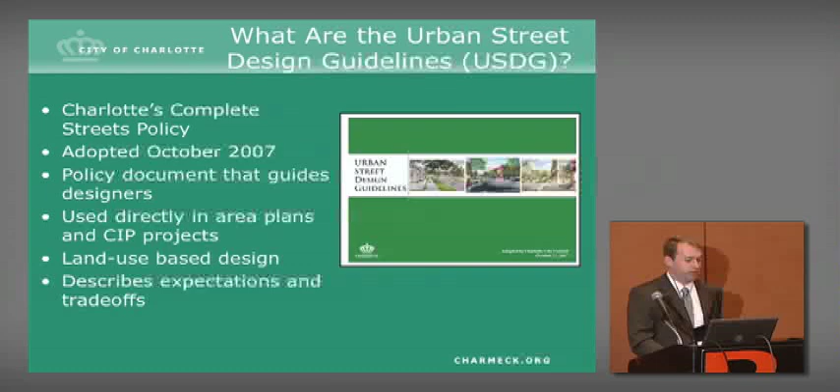But the part at the bottom was one I wanted to emphasize, which was there's a trade-off kind of rationale present in this manual that says you can't always have everything you want in your street. That's the art of good design for us—when you can't have everything you want, how do you begin to prioritize which things you are going to have?

In terms of Charlotte and why we felt like we needed a complete streets manual, when we assess ourselves and look at statistics like this, most of our thoroughfares do not have sidewalks at all. We were a city, by the way, that grew up around the automobile. There are even fewer sidewalks present on our local streets.

About half of our signalized intersections are considered poor for pedestrians. Almost all of those same intersections are considered bad for bicyclists. And about 1 in 5 of our thoroughfares are considered highly congested.

Looking into the future, we think we'll continue to be a city of growth, and over the next 20 years or so, we're expecting population equivalents of Cincinnati, Pittsburgh, or St. Louis to move to Charlotte. So we're going to have to provide infrastructure to meet those mobility needs.

So in summary, this complete streets policy is about how can we provide mobility choices for all kinds of users, build in lasting street quality through the designs, and do it in a way that really responds to the context. This is an AP-BP conference, so from a pedestrian perspective, there's obviously more to it.

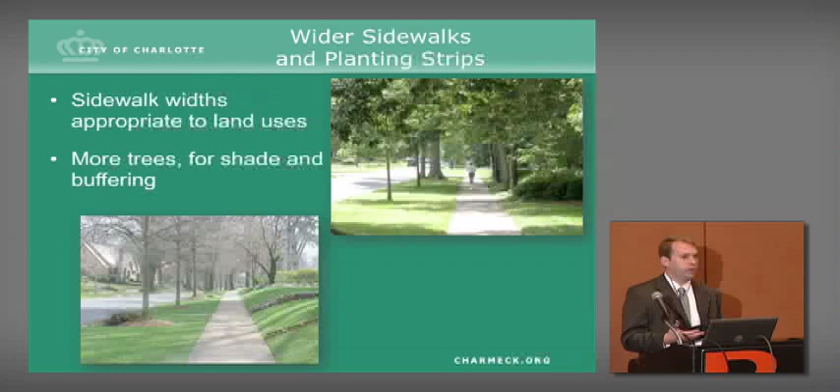The basics would be that you want sidewalk widths that are wider than what we've had in the past, but also appropriately matched to the land uses they're adjacent to. You also want more trees, more tree canopy, and separation of pedestrians from vehicles.

From a bicycle perspective, that's a philosophy that says, of course, we want bike lanes on higher volume, higher speed streets, and on lower volume, lower speed streets, we'd like to do a better job of doing bike route signage. And the cool thing about bike design is generally if you've done a good job with that, you've probably advantaged every user, not just bicyclists.

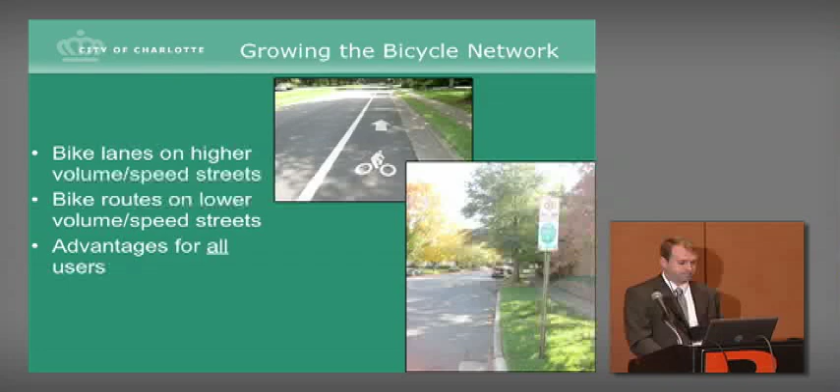One other point of emphasis in our manual is how to treat intersections. In my experience, really anybody can do a pretty decent job of designing between intersections, but it's at the intersections where all the action is. That's where all users are tending to compete for the same space at the same time.

We felt the need to create a level of service standard that was homegrown for us to deal with pedestrians and bicyclists, because we knew that historically intersections had been built around a level of service standard for cars, and we felt like we needed an even playing field to really make good informed choices.

The other part of it was - and for any traffic engineers in the room, you might know that the traditional way of evaluating how many lanes you need at an intersection is based on something called a peak hour standard for congestion, which is really a misnomer, because what you're doing with a traditional methodology is taking the worst 15 minutes of the worst hour and designing for that. And of course there are consequences all day long for the choices made for that worst 15 minutes.

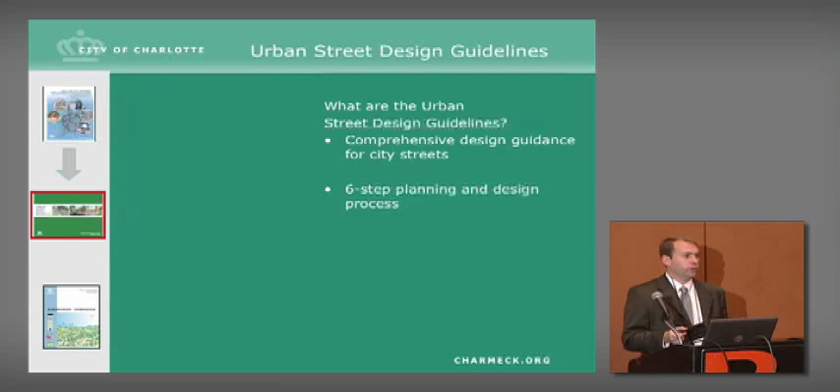Thinking ahead to implementation, the authors leading up to the development of the policy realized that what we were generating was a very thick document that few people were going to read, and we didn't want anybody coming back later saying they didn't know what they just adopted, or that they missed something. So some of the most vital components of the manual were brought forward in 17 very clear statements, so it's the first thing you read. And if it's the only thing you read, you've probably done enough good.

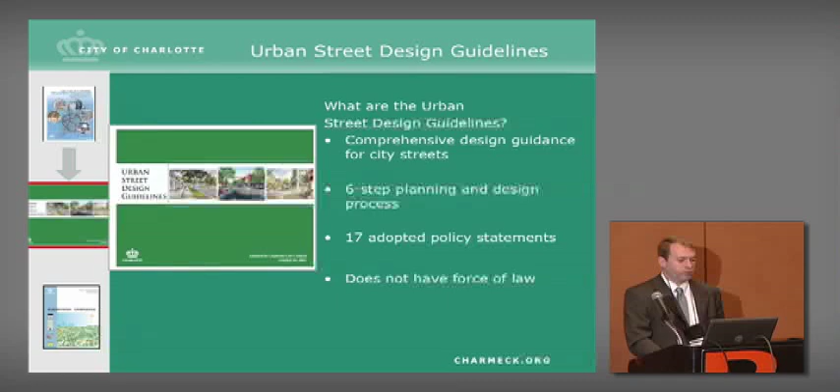But the other part of it is that the policy itself does not have the force of law. It just compels us to want to do good design. So when we're doing our own projects, we can create things like this and have implemented good projects since the advent of the manual. But if we stop there, that's all we're going to get: good designs on projects we control.

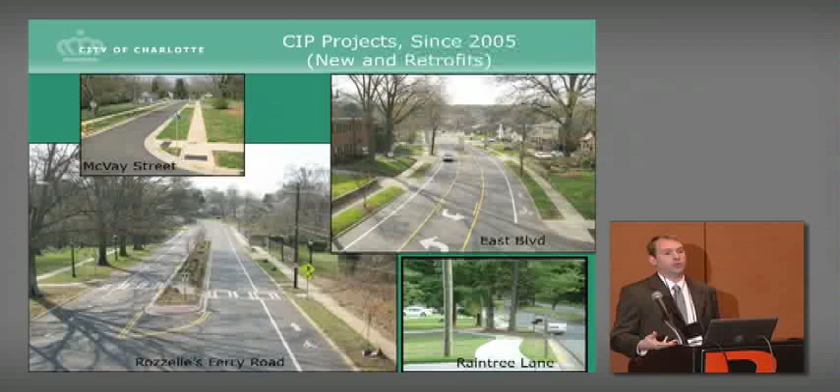So what we need to do is look at the ordinances that really drive the creation of new streets by others. For us, that's the Subdivision Ordinance, which establishes the requirements for any developer creating new streets or subdividing land. And importantly, it has the force of law.

All right, and why is that important? This was interesting - it came up in discussion getting ready for this session. The last two presenters were speaking from the experience of cities that have already built out their street network, so it's sort of an oddity that you'd even have to think about why you'd need to be talking to developers about the creation of new streets.

Well, in Charlotte, we're a Sunbelt city. We're still growing. We're a city of about 300 square miles, and there's more to go. Once our sphere of influence is fully annexed out, we'll be 375 square miles, and there will be a lot of infill that still needs to happen within what's already been annexed.

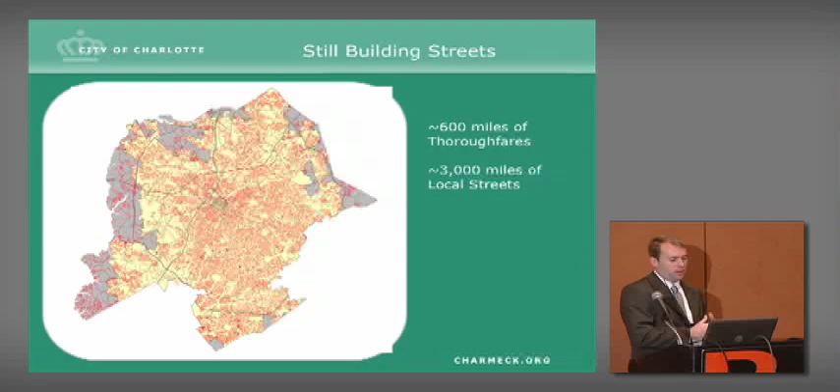In terms of the streets that the city or public sector is generally responsible for building, we've got about 600 miles of thoroughfares, but compare that to about 3,000 miles of local streets, just to give you a ratio of how much we build versus what we can expect the development community to build. So the point of all this is that developers here in Charlotte will build most of the rest of the city, so having something that has legal standing behind it is really important.

Is that street network that you just showed existing or projected? That's existing - that's an existing 3,000-mile street network, and you can kind of see where there's just holes in that network. It's dense in the core, and it's got some density in the south, but there's just a lot left to be filled in.

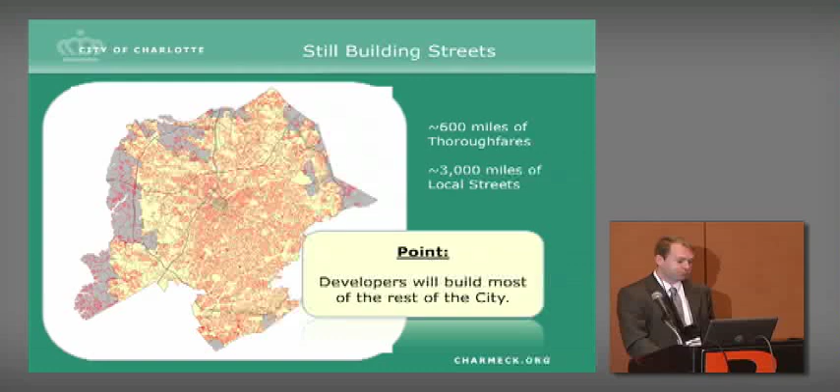So the challenge then, as we want to move the policy into ordinance, is we know we sort of fell in love with this document we just created that's really all about flexibility and thinking, but we've got to find a way to make that an ordinance that gives people some predictability.

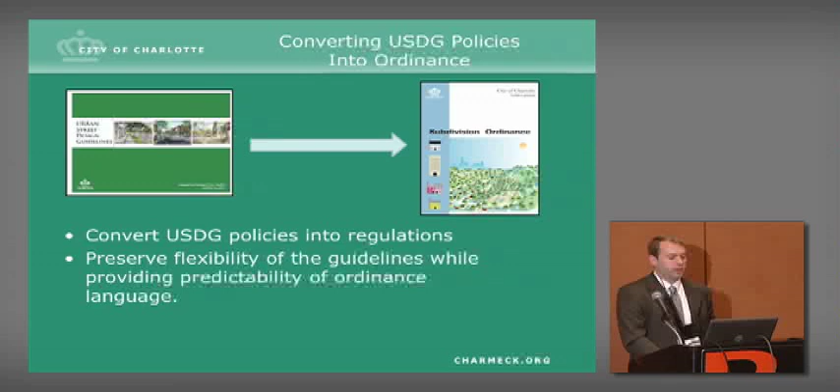As we distill down what the technical topics are that we're really working on, the biggest one is street network, for the reasons I just mentioned. The second one is the street designs themselves. These are in descending order of importance, or rather difficulty. Then street trees and traffic calming.

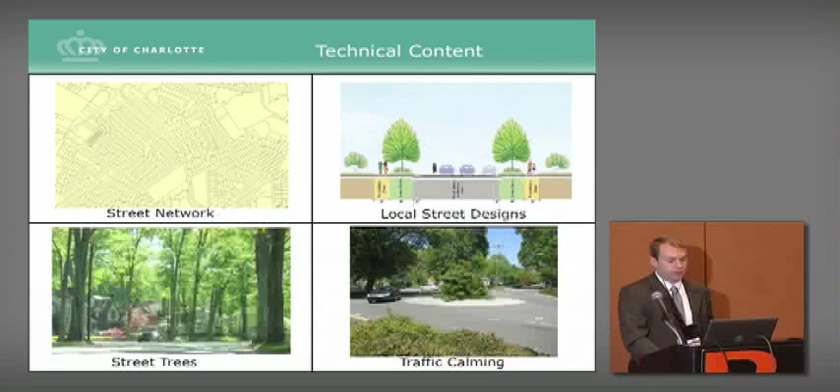As we develop the manual, we've got experience with our own area plans, our own capital projects, and to some extent developers who were willing, over a period of years, to agree to certain principles. We can throw all that in and try to make an ordinance that works.

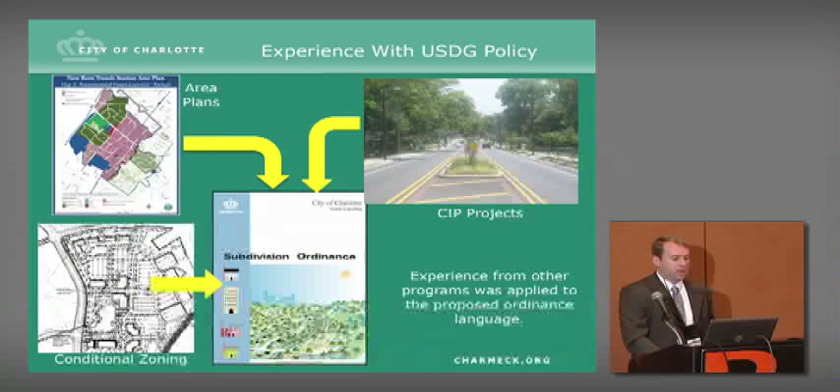So this is really the thrust of what I want to tell you: the 5 lessons learned that I learned along the way. That was the only sound effect I'm going to use, by the way.

Without walking through every step, I'll just say we cast a net to get out to about 1,400 people, of whom about 50 actually chose to stick through the process. I will admit most of them were developers, lobbyists, organized groups. They did have a lot of good comments, but it was difficult for us to get the average citizen to stay engaged. It was easier during the policy, pretty-picture phase, much harder during the ordinance phase, and I think people just didn't feel like they had as much skin in the game.

But taking it through this process, we did come up with about 30 substantive edits to the ordinance, and we really felt like in the end we had a better ordinance.

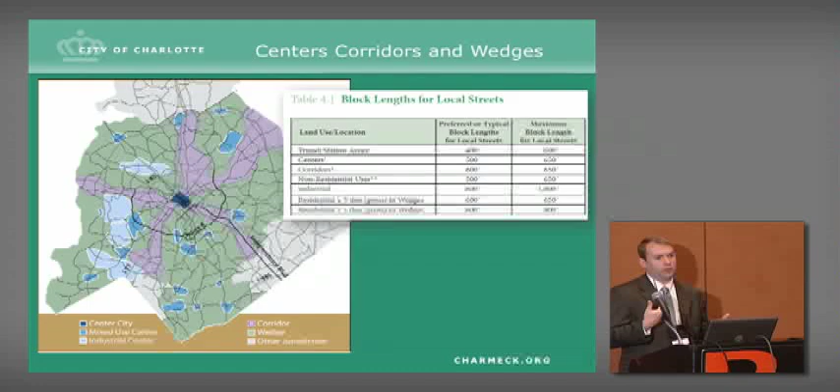We probably ought to recognize that we're going to have these wedges that are low density, probably have lower mobility needs, and need less infrastructure. On the other end of the spectrum, we have activity centers and transit station areas where we want high mixtures of use, high density, and probably have a greater need for street network.

This was a tremendous improvement over the old method. This was more fun, though. So as we write rules for street network, it's pretty simple.

You want a network of dense streets. The new network needs to relate well to the old. We need to be sensitive to reasonable concerns about what's existing on people's property. And from a developer's perspective, you're going to need those requirements to be proportional to what it is they're building. And lastly, nobody wants to have streets chop up land in a way that creates parcels that are too small to be viable.

So to get this right, we looked at all kinds of site plans, some good, some bad, but we were trying to test our rules. We had about 50 different site plans that we just referred to, asking how does this idea work, how does that one work. In the end, we came up with a system that combines some math and some common sense, and I'm not going to dwell on it, but I want to give you a feel for it.

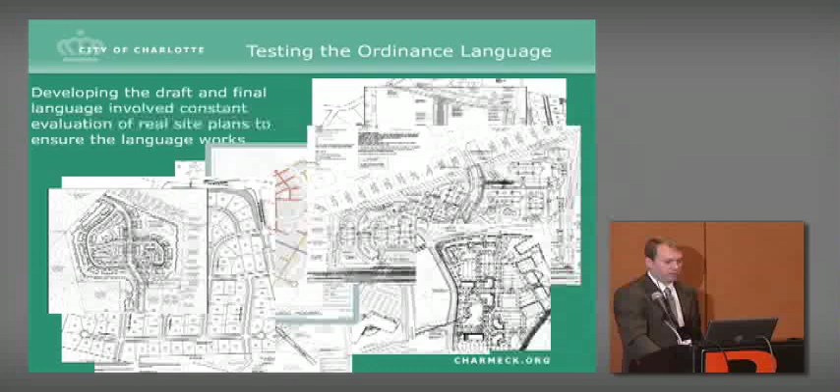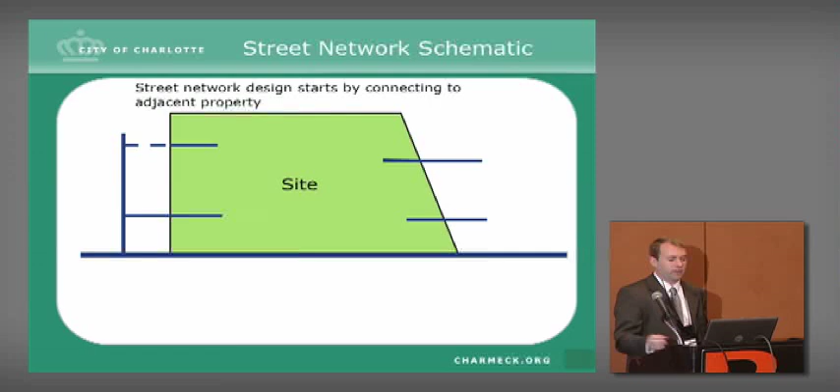So imagine you had an existing street, some raw piece of land being developed, and some recently developed streets that stub into the property. Naturally, the intuitive thing to do is extend those streets into your property.

This is where the math comes in. What you'd want to do is understand how big the property is along its frontage, and depending on where you are in the city according to that framework, you do some math. It tells you how many blocks and streets you need to break up that frontage.

You continue that math—I'm going to race through it here. When you're done, you want to ask whether any of those blocks are too big. You don't want any one block being too large, and in this case, we'll say that this all worked out just fine.

So what a designer is going to do is find some logical way to connect up that network that suits their purposes, and they may think they're done. But we don't think they're done, because you've still got some big blocks in there that need to be broken up to create a good network. That's the basic idea behind how those rules work.

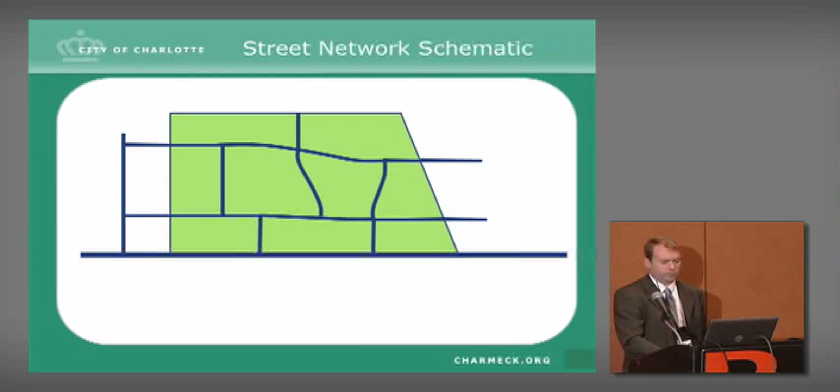Now, one of the things we stumbled on that ended up providing some relief to the development community—and we realized this wasn't much of a give for us—was we started looking at the typical residential block structure and realized that what you tend to have are long streets and short streets.

The long streets are the ones that provide access to homes along those streets, and then you've got these cross streets, whose function is really just to provide that network and break up the long blocks. So when you start looking at that in a network...

You've got some designers going to lay out a network of streets, and it turns out, at least from our perspective, you don't need those to be in a regular repeating rhythm. You just need them to be able to move around based on where you think you're going to need the connectivity, and as long as no one block gets too big, we'd say you're fine.

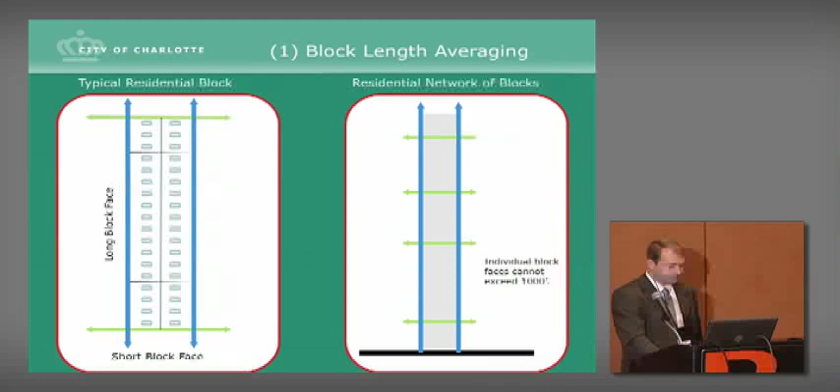So we introduced this block averaging concept that seems to be working pretty well. Last thing I'd say about street network—and I spend a lot of time here because network was by far the most controversial technical topic—is that this is the one that's really going to tell a developer how often they're going to have to not build a building and instead build a street on it.

So what we did was we found a site that was widely regarded in Charlotte as being a model of mixed use, good street network, but it also served some big box retail. It was just a successful place. So our rules needed to be ones that didn't destroy what was considered a successful project. We not only tested it, but this ends up being the thing we come back to over and over again to show that the rules can work.

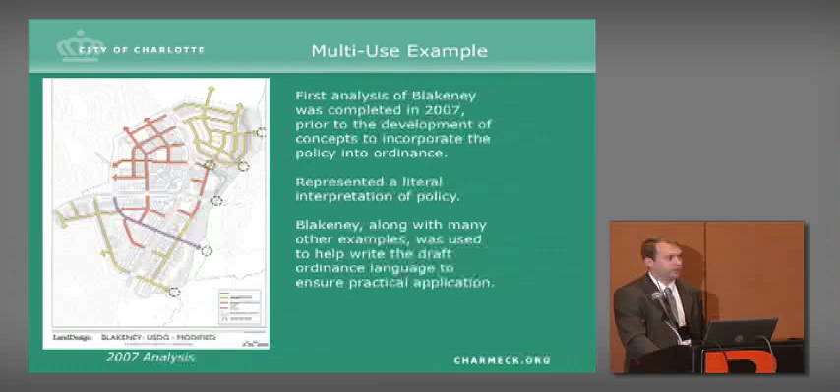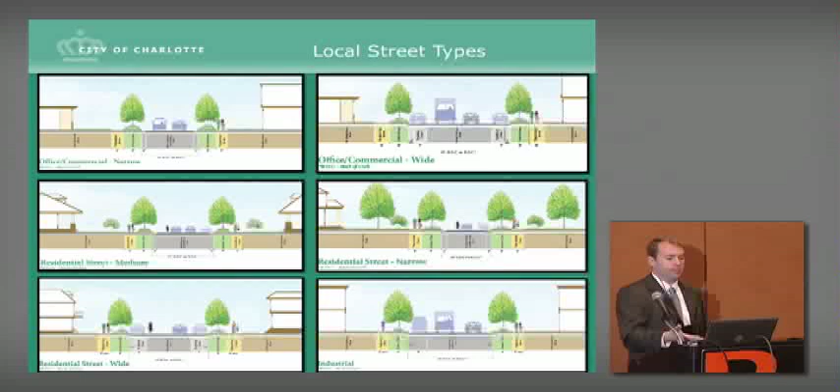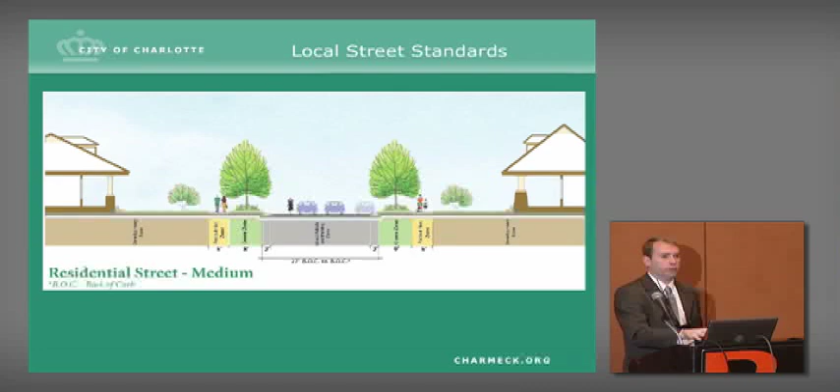From the perspective of standards, interesting that this has become a hot button in this session. We know when we're doing our own streets, we can work with pretty pictures that convey a certain amount of intent. If someone's reacting to an image like this, there's an underlying subconscious message: think about what you're doing, your placemaking. But you can't give this to a contractor or a developer's engineer to build a street. Unfortunately, we need to convert those images into drawings that end up in a manual for how to build handrails, culverts, and all other kinds of stuff. So the challenge is, how do you keep people from losing that mindset?

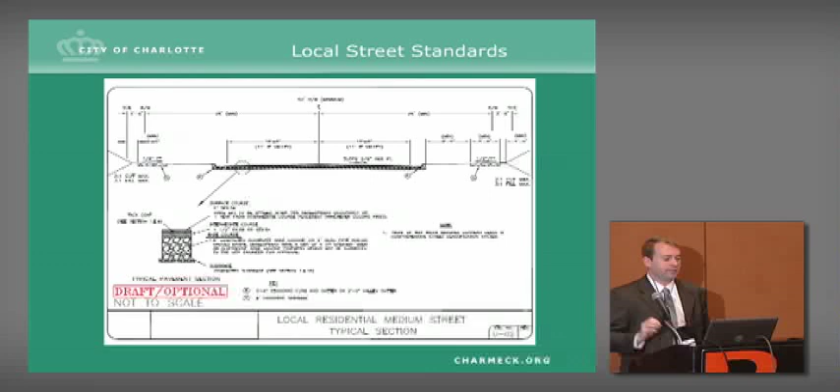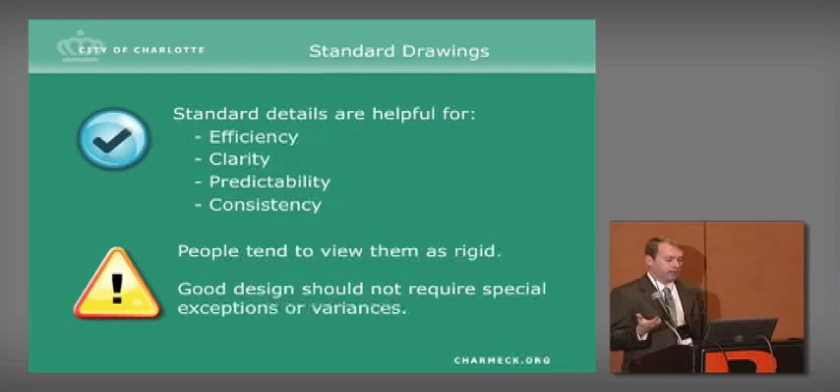Truthfully, we haven't really cracked the code. Standards are really helpful and necessary for efficiency in design, clarity, letting people know ahead of time what's expected, and having consistency to some extent. But the hard thing is people intuitively or naturally tend to lose that sense of flexibility. It's just my personal belief that good design should never require that you get special exceptions or variances. So as you're creating these details, it's important that the people who use them understand that you can rewrite a detail overnight if you need to. They tend to not need new ordinances and things like that.

Last lesson is: be ready to go to the next level. You're going to rewrite a bunch of stuff, and you need to understand that whatever you wrote probably has some secondary effects. I'll give you a couple examples.

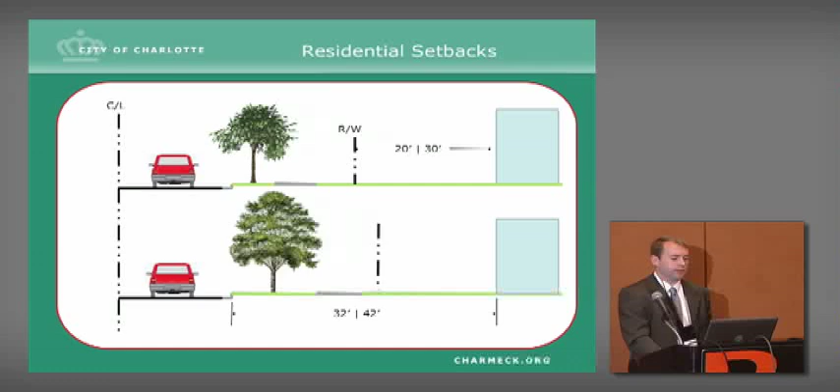One had to do with setbacks. When we compared an old street to a new street, first I need to tell you that we would measure a residential building's setback off of a right-of-way line. As we compared our new streets and found a close match to an old street, we saw the only thing changing was the sidewalk got a foot bigger and a few more feet from the curb. So that right-of-way no longer contained that sidewalk section, the right-of-way moved out, the street got bigger, but we saw no need to move the building. So we needed to rethink how we measure setbacks and wrote a zoning ordinance amendment that changes that.

Second example is simpler. In the city of Charlotte, we have a tree ordinance that requires people to plant trees under certain conditions. For whatever reason, we had rules that said those trees had to go in the setback, not the street right-of-way. So it was a simple change, but more consistent with what we're trying to accomplish, that we would want people to be able to put those trees in the street right-of-way, helping it be a functional part of that street design. So that was a tree ordinance change.

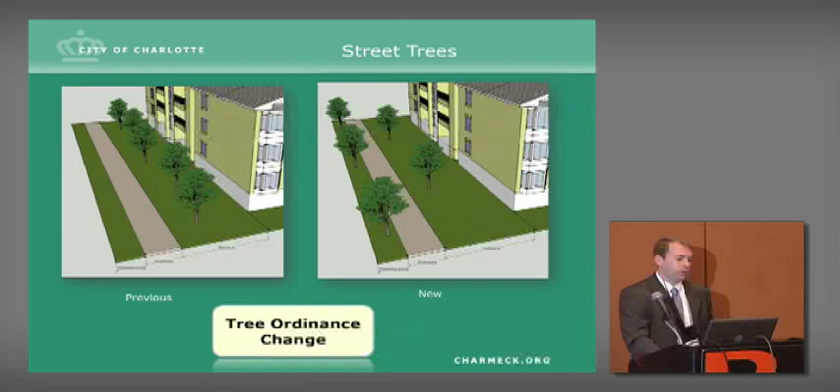We learned a lot more than this, but to recap: transparent public process; flexibility can be provided if you use common sense and consider alternative compliance ways of getting approvals; third, street network rules are really key, try to base them on common sense; standards are sort of a necessary evil, so work on the message that goes with them; and fifth, be willing to go deeper into the other ordinances and fix whatever stuff you might have monkeyed around with and not known about.

That is it. I'm not from Charlotte, came here for the conference, but I've been staying with a family about 6 miles south and riding my bike in every morning, so it's been interesting experiencing some of the street changes you've done.

My experience has been that the streets that have been converted, often from 4-lane to 3-lane with bike lanes, are great for me. They give me a significant added level of comfort, but I'm a daily bike commuter. My sense is that they will better accommodate existing bicyclists and integrate them more smoothly into the streetscape, not substantially expand the pool of people who feel comfortable bicycling. I'm wondering if you've considered that broader philosophical question in the design standards you have for bike lanes, and if you've come down on one side or the other of what exactly you're trying to do with your bicycle accommodation.

Sure. I would say it's not fully resolved among our own ranks about what exactly we're trying to achieve with bike lanes, but the way I sort this out is, ideally, we would never need bike lanes. If we have a robust network of local streets that are low volume, low speed, but still provide connectivity to where people want to go, you should never have to be in a bike lane. But that's not the network we've built in Charlotte, and we're going to have a lot of reliance on workhorse thoroughfare streets that are always going to have high volume, high speed. So as we've done those kind of conversions, we've probably just accomplished the basics of providing space for a cyclist to have a place to be in the street. But in honesty, when we take a 4-lane street and make it a 3-lane street with bike lanes on either side, the bike lane is just one of the benefits we get.